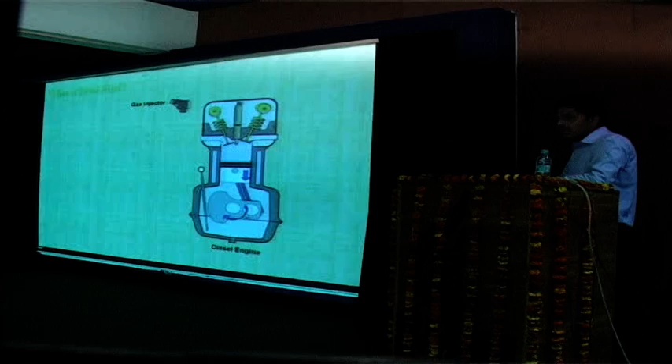So it is very important that Delhi be provided natural gas so that Delhi can be pollution free. Nowadays, Delhi has the world's largest CNG bus fleet, having 15,000 buses taking minis and RTVs together, so Delhi is breathing clean air. What is dual fuel? We can use natural gas by this method.

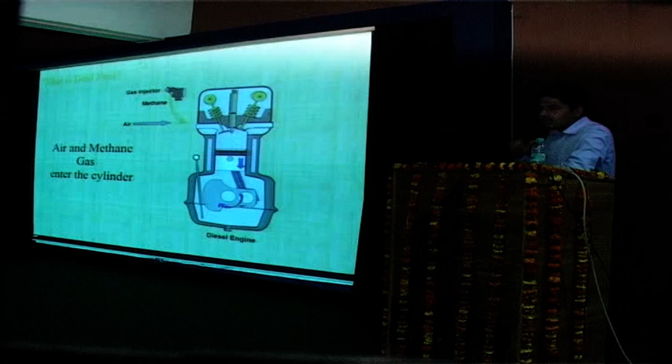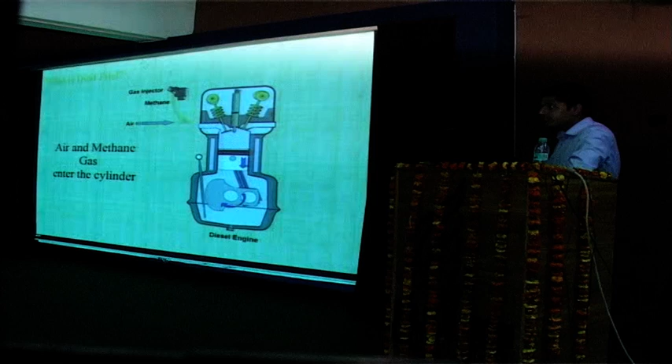First of all, through the gas injector, the combination of methane and air collectively goes to the combustion chamber by the inlet port. Then the air and methane gas mixture is compressed in the combustion chamber.

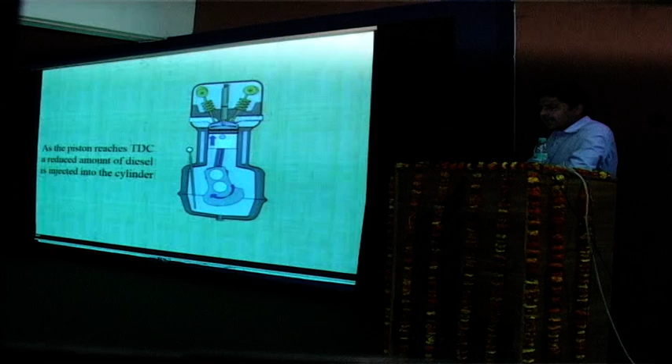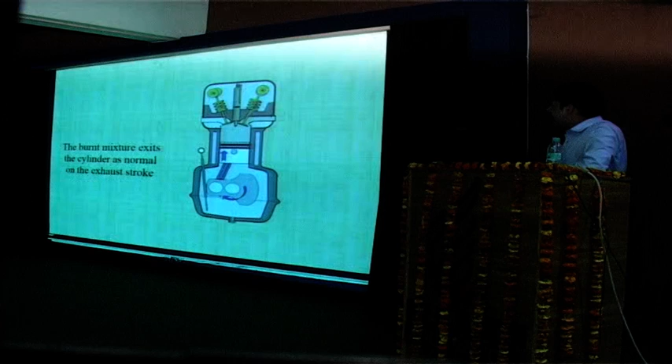After that, the piston moves to the top, that is top dead center, and a reduced amount of diesel is injected so that the diesel ignites and the methane and air mixture combusts. Then the mixture exits the cylinder in the normal exhaust stroke, as in a normal diesel and petrol engine.

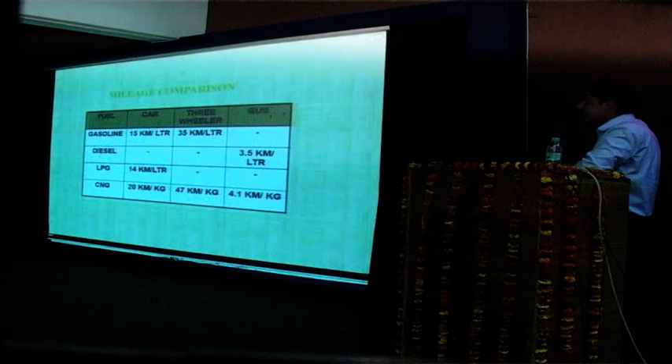Now the comparison is made of mileage using gasoline, diesel, LPG and CNG in car, three-wheeler and bus. Using a car with gasoline as fuel, the mileage is 15 km per liter. In a three-wheeler it is 35 km per liter, while with CNG it is 20 km per kilogram, 47 km per kilogram in a three-wheeler, and 4.1 km per kilogram.

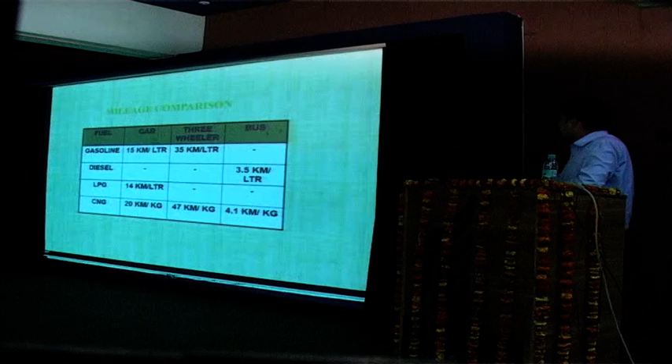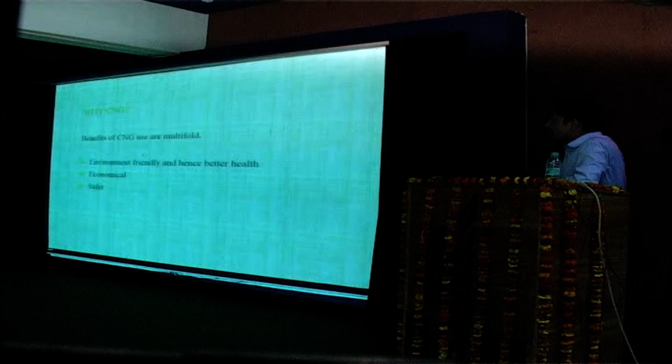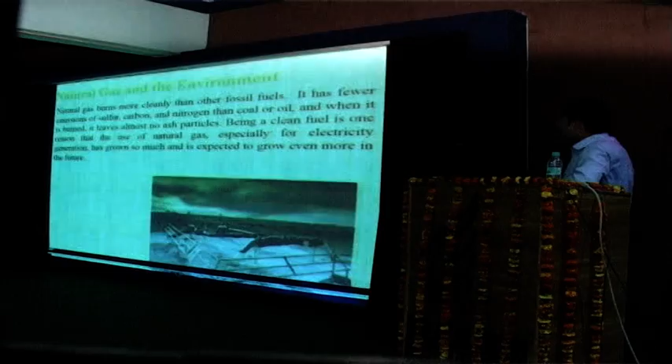So it is obvious that we should use CNG, which is beneficial, cheaper and safer. Why CNG? Because CNG is environment friendly, economical and safer for us and for our health. Now at last, I would conclude that natural gas burns more cleanly than other fossil fuels, and the emission of sulfur dioxide and carbon dioxide is minimum with natural gas.

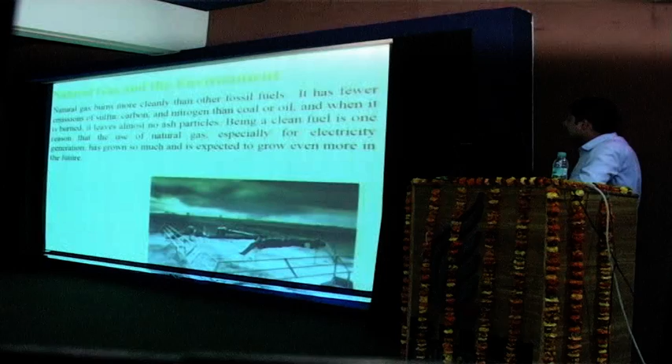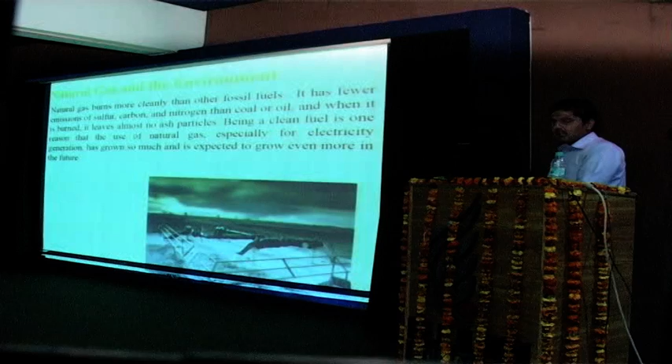So we should use natural gas and other non-conventional sources like wind energy and solar energy. Wind energy is almost the best way in India. India is in fifth largest position in wind energy, after Germany, USA, Spain and China. It is in fifth position in the world.

Now, the safety aspect of CNG: it is lighter than air, and even if it leaks it will rise and disperse in the atmosphere, so it is very safe for us. The combustible ignition range is 5% to 15%. The ignition temperature of CNG is high, at 540 degrees centigrade.

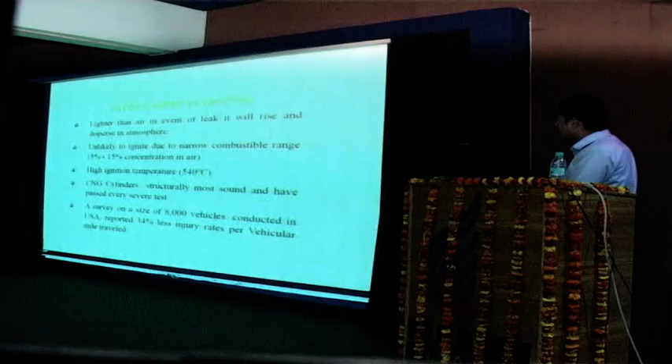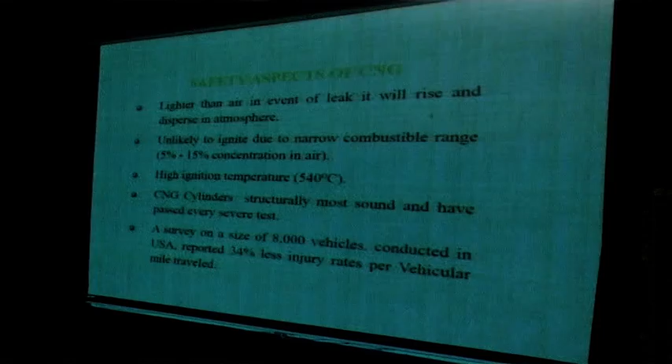CNG cylinders are structurally more sound and have passed severe tests. One survey was also done: out of 8,000 vehicles in the USA, 34% less injury per vehicle mile traveled was reported. So it is very good for us to use natural gas as a fuel.

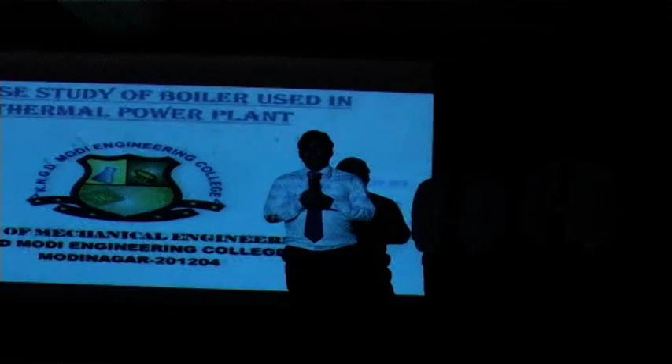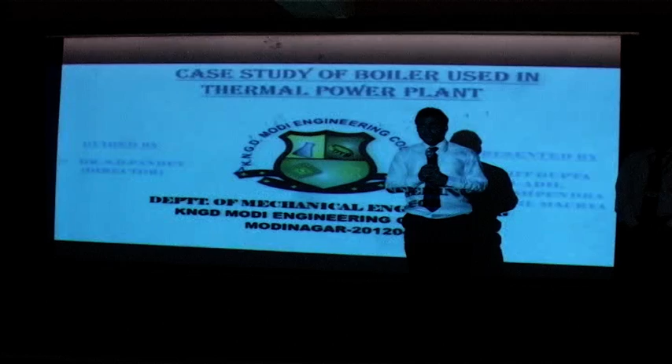To discuss our final year project, which is a case study of boiler used in thermal power plant. We are doing this project under the guidance of Dr. S.D. Pandey sir, the director of our college. But before starting the presentation, I would like to introduce you to my teammates: Pushpendra, Amit Kumar Gupta, and Sunil Kumar Maurya.

Yes, but now I would like to illustrate the presentation with a little overview of a video, which is of the working of a coal power plant. Yes.

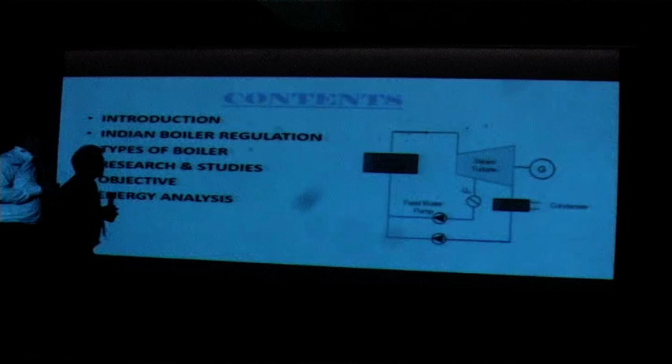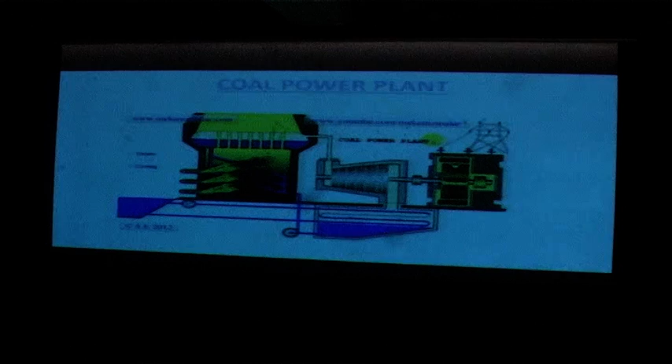Educational video series. Half of the world's electricity is generated by coal power plants, and there are close to 3,000 large coal power plants around the world. In this video, we're going to show you how these controversial yet indispensable power plants work. The idea behind the power plant in this...

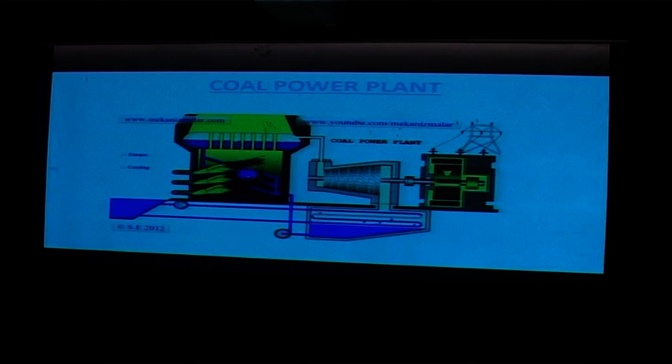Yes, as you saw in the video, you might have got a little bit of idea of what things are going to be discussed in this presentation. First of all, let's have the contents which I and my friends will discuss. First is introduction to the boilers. Second is Indian boiler regulations. Third is types of boilers. Then comes research and studies which have been conducted in these fields. And finally, our objectives. And the last point is energy analysis.

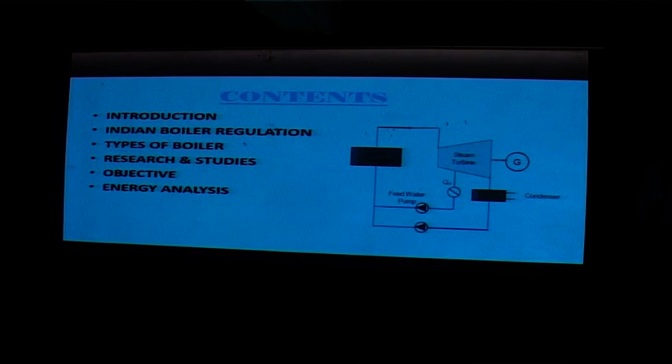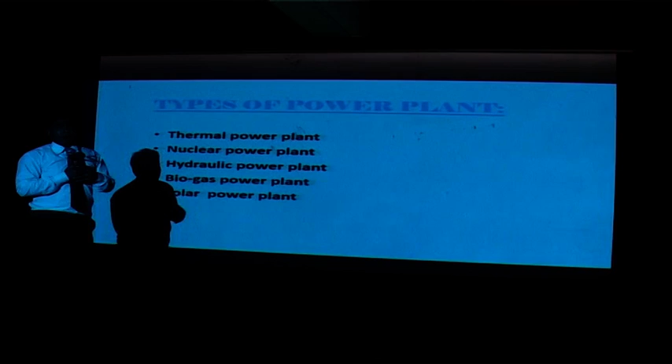Electricity is provided in the country with the use of various sources, such as thermal power plant, solar energy, coal energy, etc. Thermal power plant uses coal as a source. Nuclear power plant uses nuclear elements such as uranium as a source. Hydraulic power plant uses water as a source. Biogas power plant uses byproducts, rice husk, straws, etc. The last is solar power plant, which is a renewable source of energy, an everlasting source.

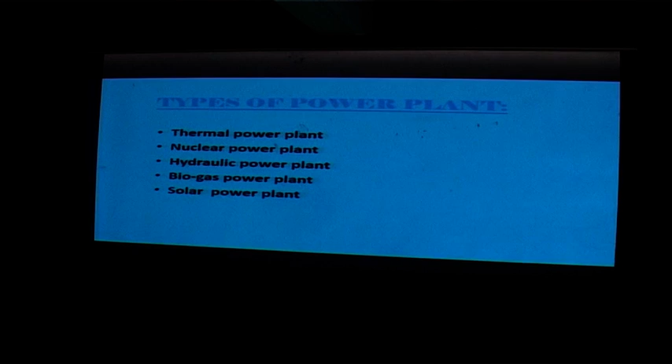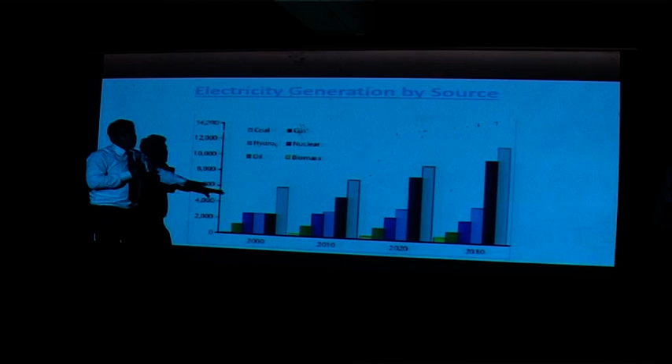Here you can see the graph presenting the production capacity of the various sources in past years and upcoming years. This graph shows the contribution by coal, and you can see that every year coal is the highest contributor of energy production. The second contributor is gas, this violet line. The third one is hydro. Fourth one is nuclear, and fifth one is oil. And the least contributor of energy production is biomass.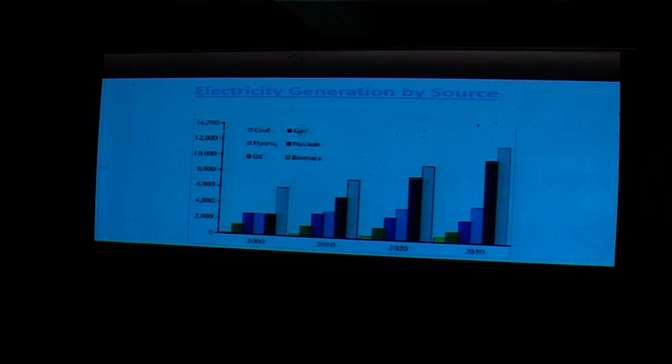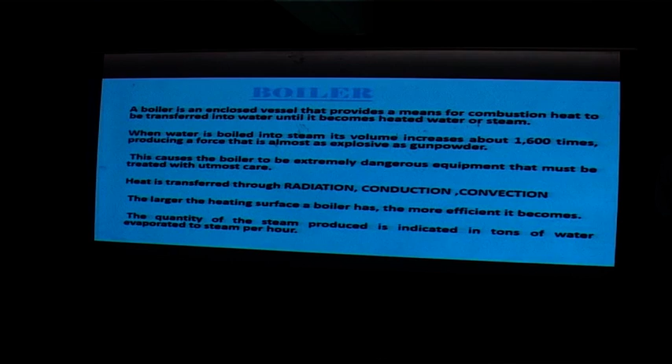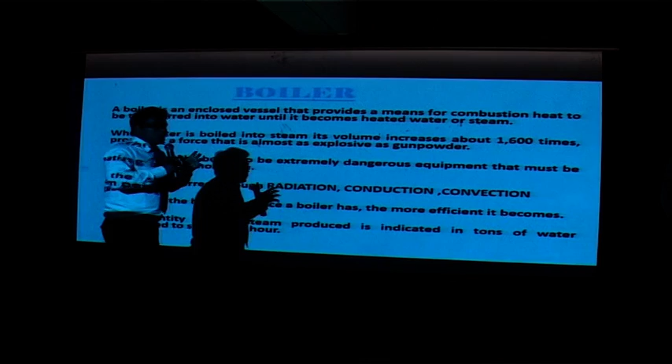Now comes the boiler. Boiler is an enclosed vessel which converts water into steam by hot flue gases, which pass through the water tubes in the boiler, and when the water in the boiler gets heated and converts into steam, the volume of the steam increases up to 1600 times, which is as explosive as gunpowder. Means the force exerted by this steam is as explosive as gunpowder. Therefore, it is to be taken care of, because the boiler, if not handled carefully, can be a dangerous equipment as well.

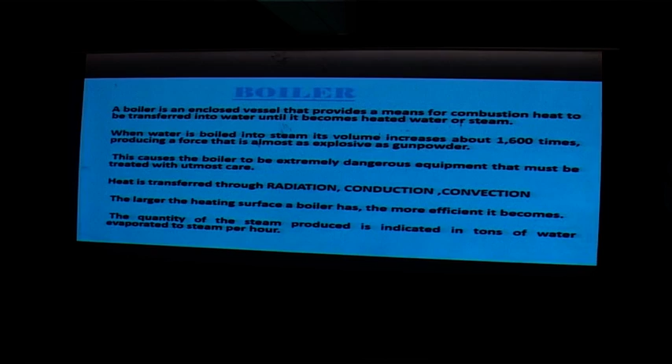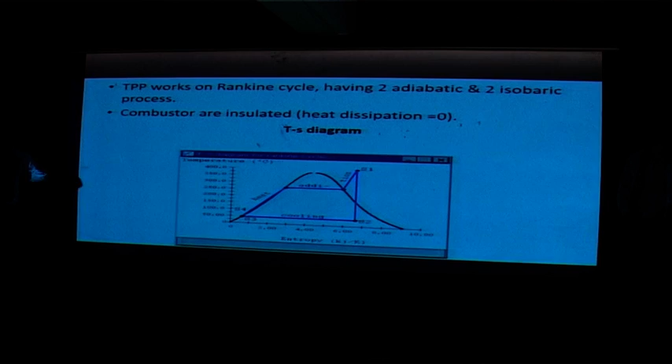Heat is transferred through radiation, conduction and convection. And the larger the heating surface of the boiler, the more efficient it becomes. As we know, the thermal power plant works on the Rankine cycle, which has two adiabatic processes and two isobaric processes. Here we can see the TS diagram of the Rankine cycle. Process 1 to 2 is an adiabatic process, 2 to 3 is an isobaric process, that is a constant pressure process, 3 to 4 is again an adiabatic process, and 4 to 1 is again an isobaric process.

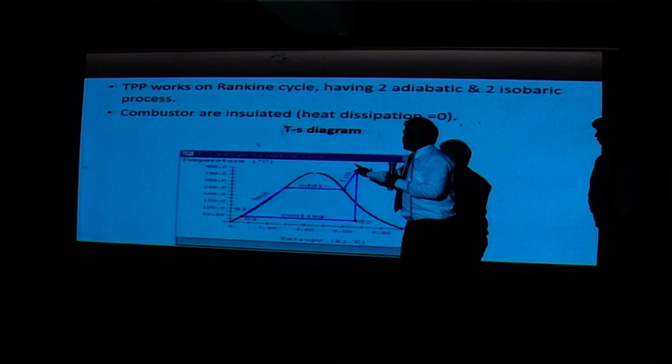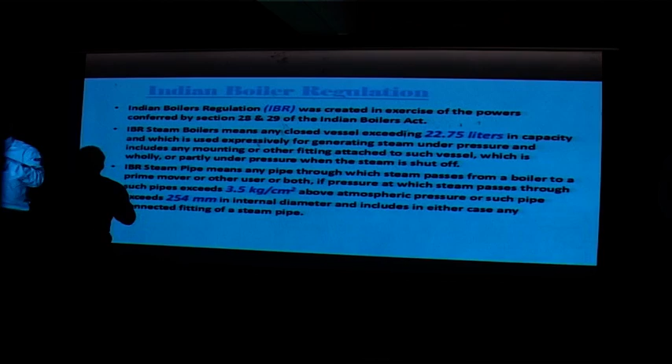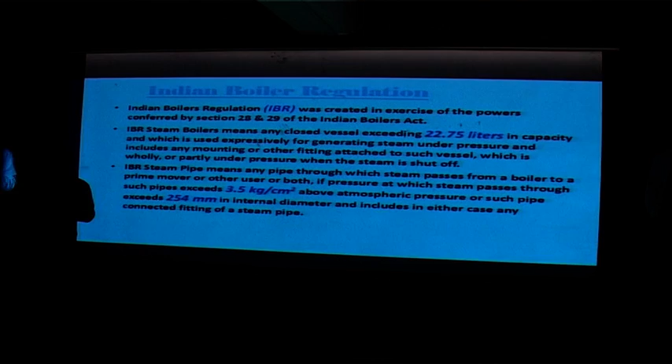Now, here is the point, Indian boiler regulations. You might have got some idea about regulations. Indian boiler regulations are the rules and regulations that are considered while making the boiler and the mountings. They were created under sections 28 and 29 of the Indian Boilers Act. Indian boiler regulations say that a boiler is any closed vessel whose capacity exceeds 22.75 liters, as you can see here, and includes mountings and accessories attached to it, and the sole goal of that particular closed vessel is to generate steam.

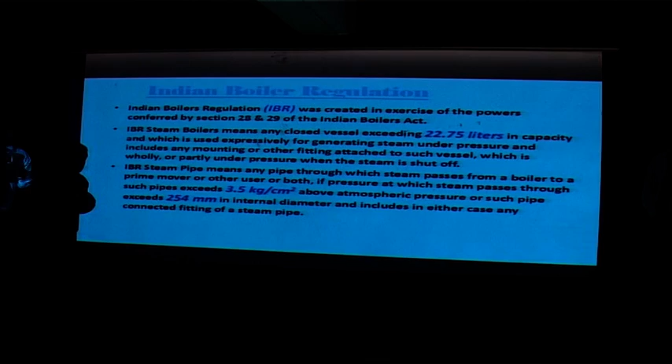So all these are the parameters on which the boiler is decided according to the Indian Boiler Regulations. Now coming to the steam pipes. A steam pipe is again any pipe through which the steam flows from the boiler to the prime mover or user, or both. But here there is also a condition: the pressure of the steam inside the pipe exceeds 3.5 kg per centimeter square, or the internal diameter of the pipe through which the steam is flowing should be exceeding 254 millimeter.

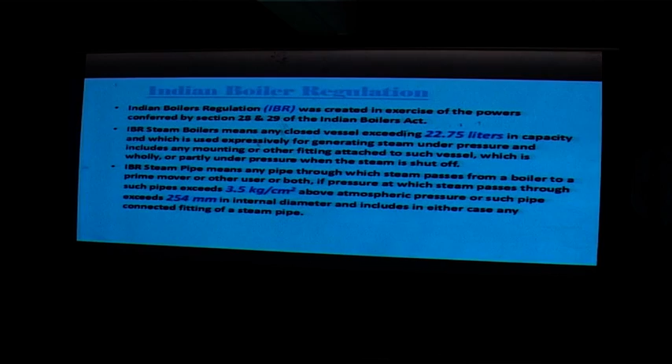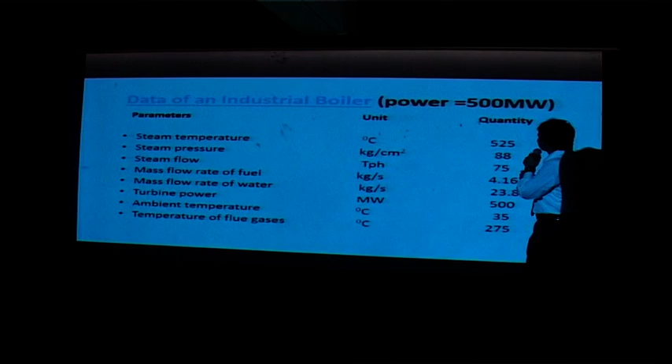Here's the data of an industrial boiler, which has a production capacity of 500 megawatt. It is taken from the Obra power plant. First one is the steam temperature, which is 525 degrees centigrade. Steam pressure is 88 kg per centimeter square. Then the steam flow is 75 ton per hour. Mass flow rate of fuel is 4.167 kg per second.

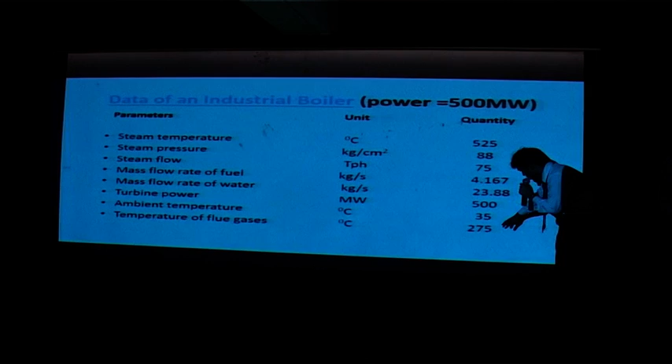The mass flow rate of water is 23.88 kg per second. Then the turbine power is 500 megawatt. Ambient temperature, which we can consider as the outside temperature of an industry. Then the temperature of the flue gas is 275 degrees centigrade, which is sufficient to convert the water into saturated state.

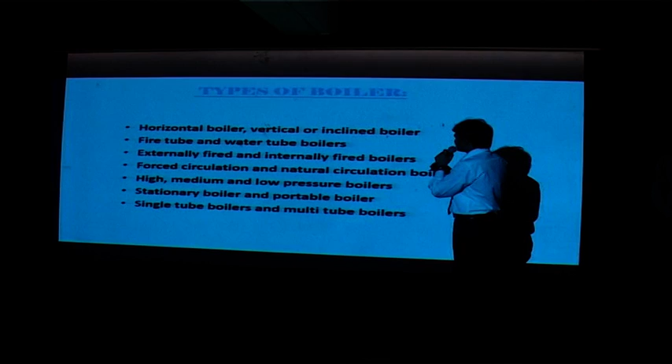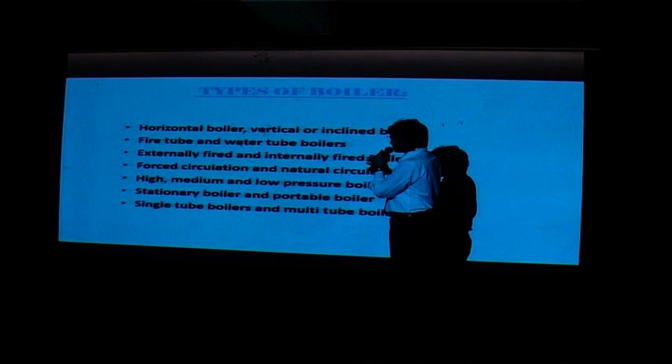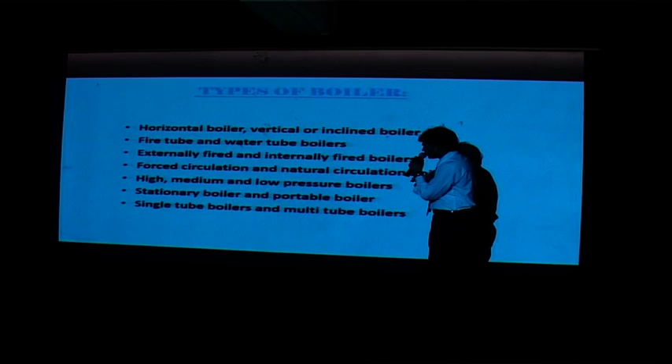Externally fired and internally fired boiler. In externally fired boiler, the furnace is placed outside the boiler shell, and in internally fired boiler, the furnace is placed inside the shell. Then forced circulation and natural circulation boiler, then high, medium and low pressure boiler, then stationary and portable boiler, and single tube and multi-tube boiler.

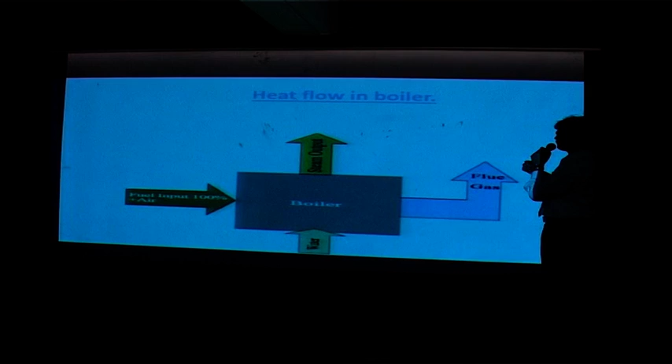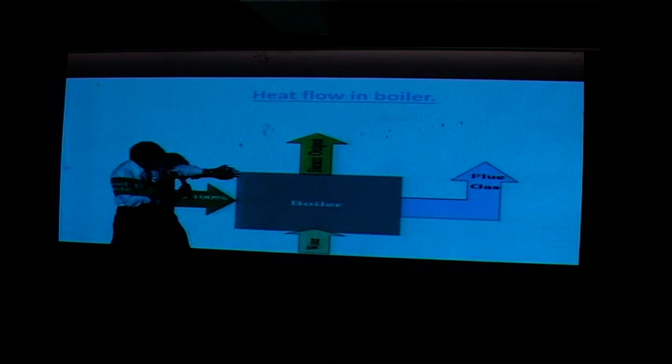There's a flow chart of how heat flows in a boiler. Here we can see that fuel is burned in the presence of air, which produces the heat which is taken in the boiler, and the water is converted into steam, which does the work on the turbine. And the residue gases, known as the flue gases, are discharged into the atmosphere.

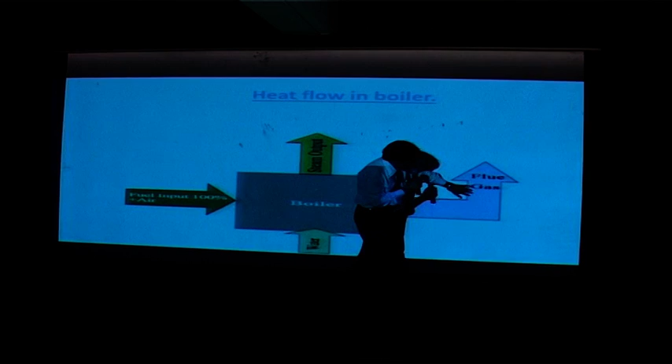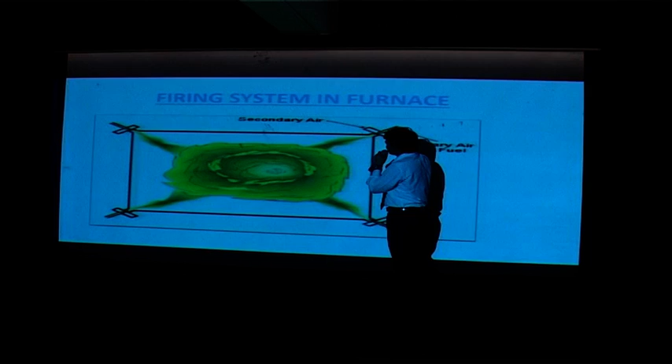Here's the firing system in the furnace, how the firing is done in the furnace. All four corners are fired, through which the pulverized coal is fired. You can see primary air and fuel: with the fuel, air is also passed, and here's the secondary air, which means that the induced fan is implemented to throw the air for the burning. Next one.

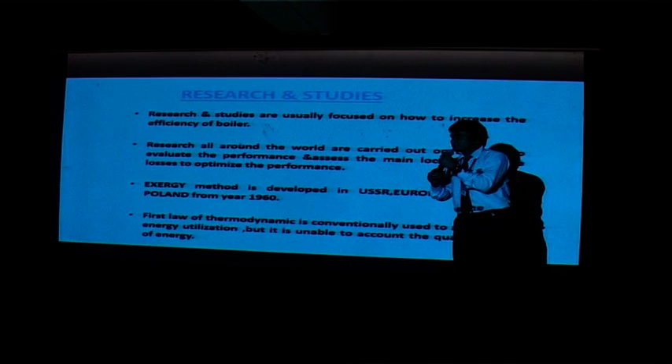Here are the research and the studies. Usually, much of the research conducted by scientists is focused on how to increase the efficiency of the boiler rather than on the design of the boiler, since the boiler has been designed by the manufacturing process, welding process, and it is manufactured, and maintenance is done at regular intervals so that leakage is not allowed from its surface.

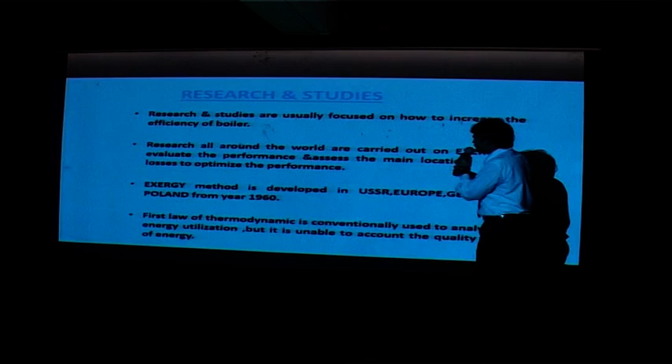Research all around the world is carried out on exergy to evaluate the performance and to point out the main locations of the losses so that optimum performance can be achieved. The exergy method was developed in the USSR, Europe, Germany, Poland from the year 1960. It is the first law of thermodynamics in which we analyze the energy, but it does not give the quality of the energy, which means how much useful work can be done from energy.

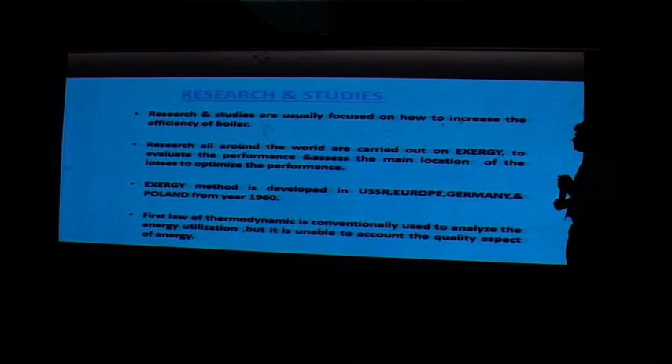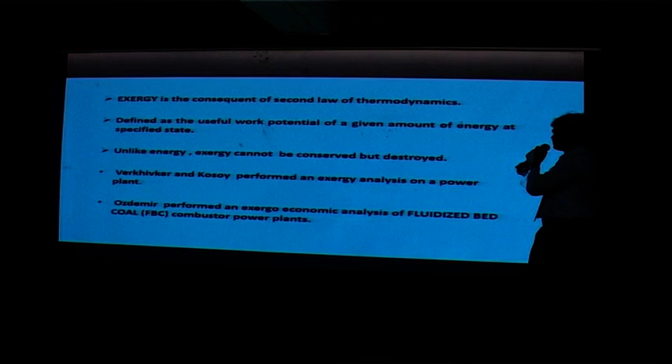Then the second law comes into existence. Exergy is the result of the second law of thermodynamics. Then what does exergy mean? Exergy means the potential of energy which can do useful work at a specified state. Unlike energy, exergy cannot be conserved, it is only destroyed.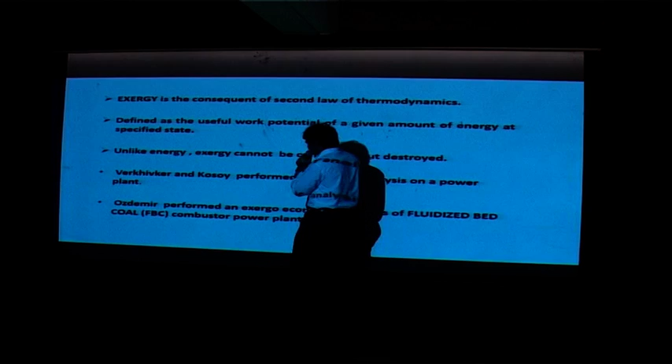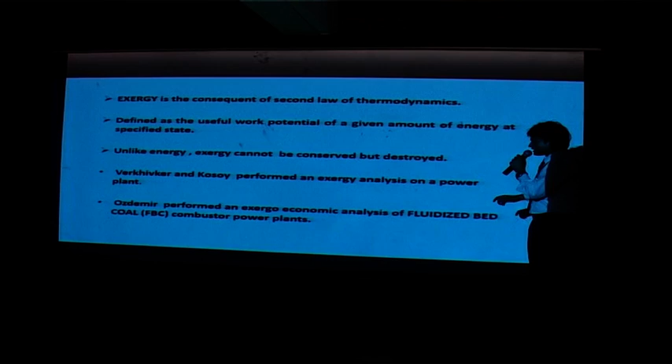Here the two scientists, Verkhivker and Kosoy, performed exergy analysis on a power plant. Then Ozdemir performed an exergoeconomic analysis of fluidized bed coal. He uses rice husk, straw and other things as a fuel for the power plant.